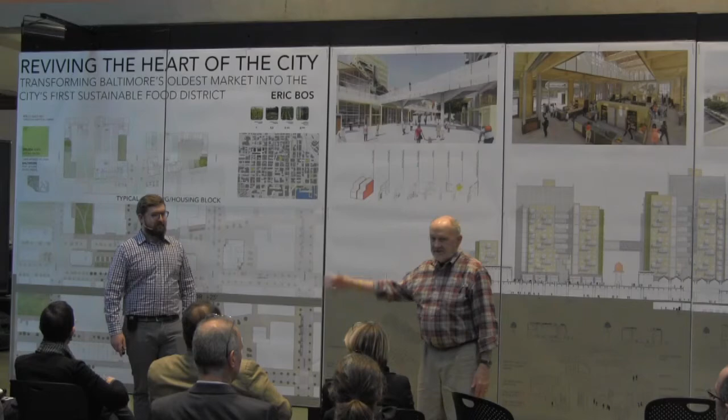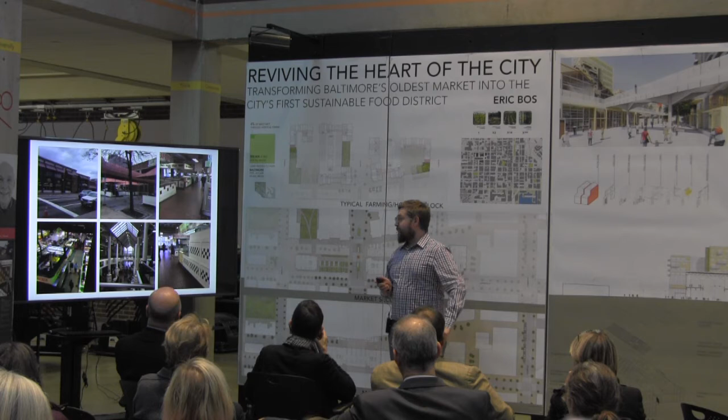10 years ago, I visited Lexington Market for the first time, and I thought to myself, where is all the food? As the market was then, as it is now, a series of bodega-like stalls selling chips and candy, fried chicken stands, and vacancy. Out of 97 stalls, 35 are vacant. Only 10 sell fresh meat, fish, or produce. This is the central market of Baltimore, a place where I expected to find abundance, but found scarcity.

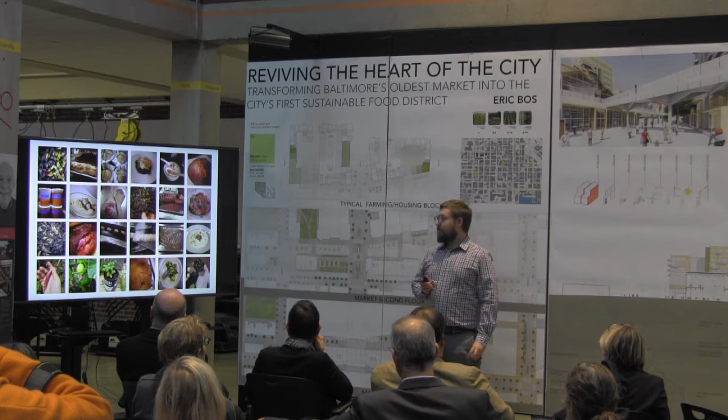So this thesis is about food. It's about how to replenish an abundance of good food in the city, of availability and access in Baltimore. A lot of neighborhoods don't have access to good food, instead replaced by snacks and junk food. And these food deserts affect 18% of the population in Baltimore, including, ironically enough, the neighborhoods directly west of the market.

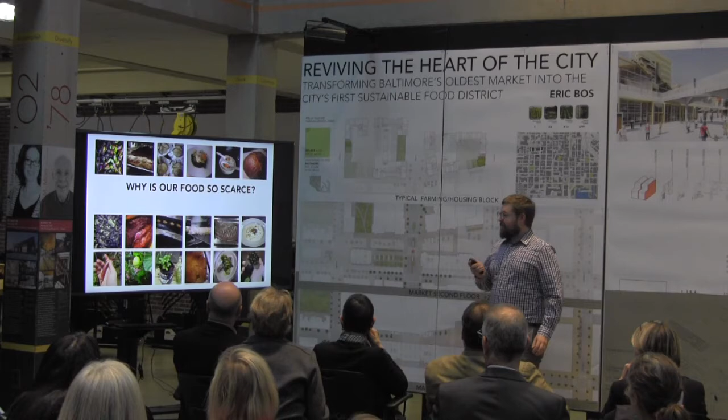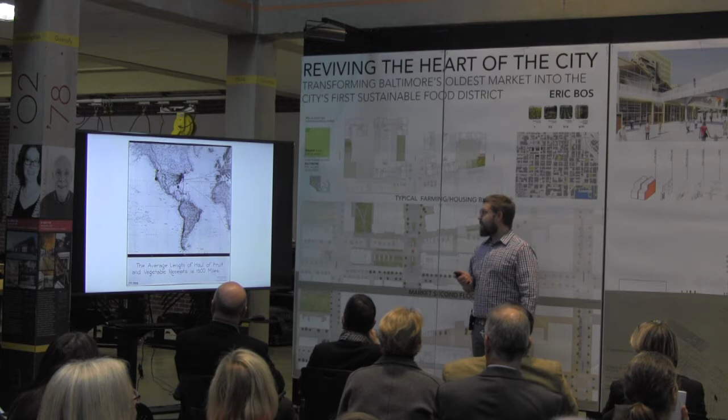But why is our food so scarce in the city? Part of the problem is that our food is grown far, far away. This is a graphic from 1924, and as you can imagine, we've only gotten more global since then. This creates two big problems. One, we're distancing ourselves from the food that we eat, from our knowledge about what's available in nutrition, and also it's placing an enormous carbon cost on each bite that we take.

But our urban history, from the Roman castrum at least through the Garden City movement, has been based on some degree of self-sufficiency, not on a global food system, where a dense urban core is surrounded and fed by farmland, which is then surrounded by forests and rivers and lakes and nature. But as our cities have grown in the last 100 years, that farmland's been replaced by sprawling suburbs, which has replaced our nature with farmland to feed everyone. And this is a trend that can't continue indefinitely.

In the next 30 years, 2.5 billion people are going to enter the earth. If this were to continue, we'd have no nature left and everyone would be hungry.

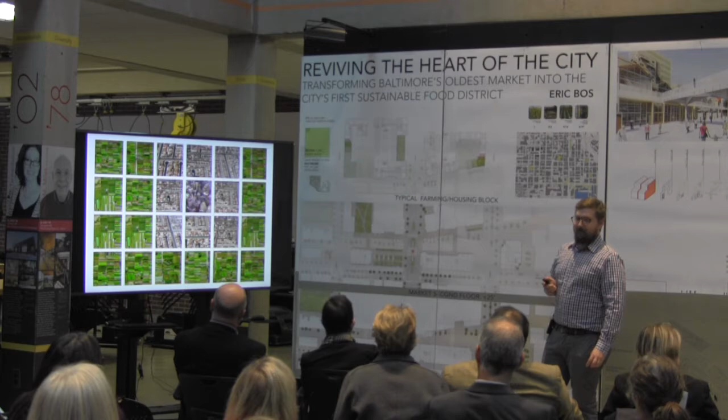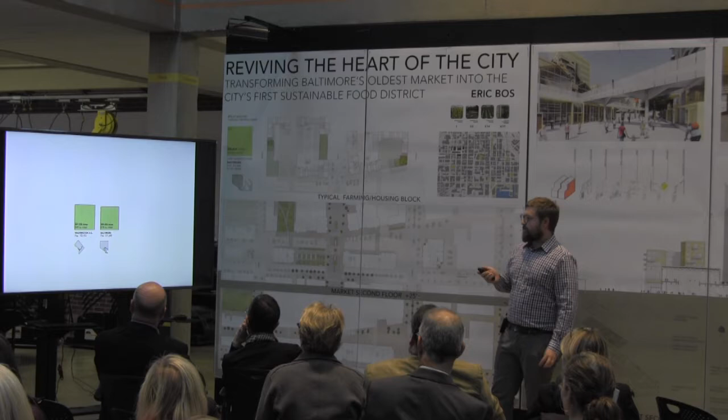Cities require an enormous amount of land outside of themselves to feed themselves. Here, DC and Baltimore, roughly equal-sized cities, require 5 or 6 times their land mass outside of themselves to be fed. Now compare that with New York, a slightly larger city, but so much more dense that the actual land taking to feed the city is just enormous.

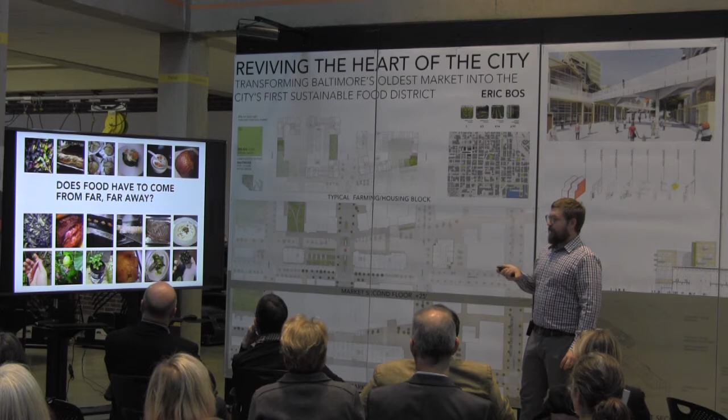Now, does that food have to come from far, far away? And of course the answer is no. Isn't it possible to densify our food production just like we have housing in cities like New York? Effectively turning the paradigm of the city surrounded by the farm to one of the farm surrounded by and providing for the city. And this is urban agriculture.

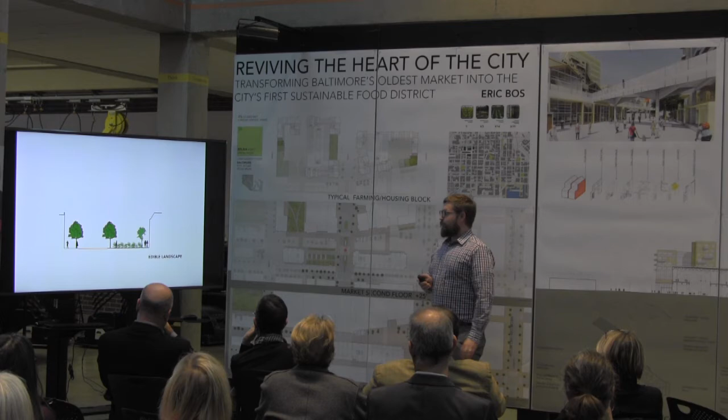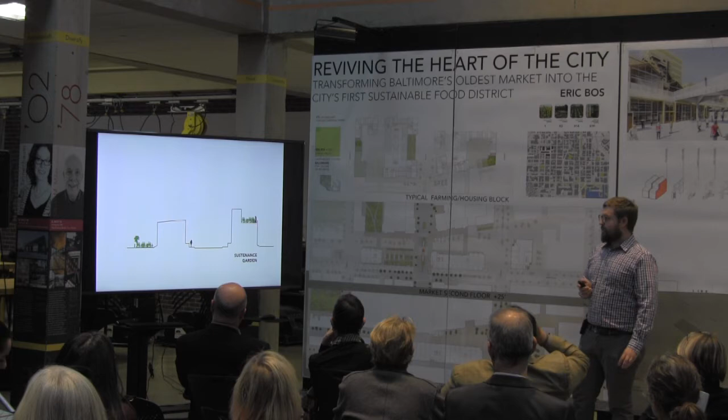Now, 3 main types of urban agriculture. One is the edible landscape, where tree line boulevards become orchards, and food is ripe for the picking all around you. The second is personal plots of land, where you're feeding your family—community gardens and backyard gardens, or the sustenance garden. And the third is a super productive indoor farm, or vertical farm, where we're feeding a large amount of people in a very small amount of space.

And we do this through really increased efficiencies. Most of our farmland is monoculture farming, which we use as a baseline. We have rows and rows, acres and acres of one product. If we take that and put lots of different types of crops together, it's intensive soil farming. So in our backyard gardens or community gardens, we can get 3 times the output. We bring that indoors using hydroponics, and it can increase by 14 times. When we stack these hydroponic systems, the sky's the limit.

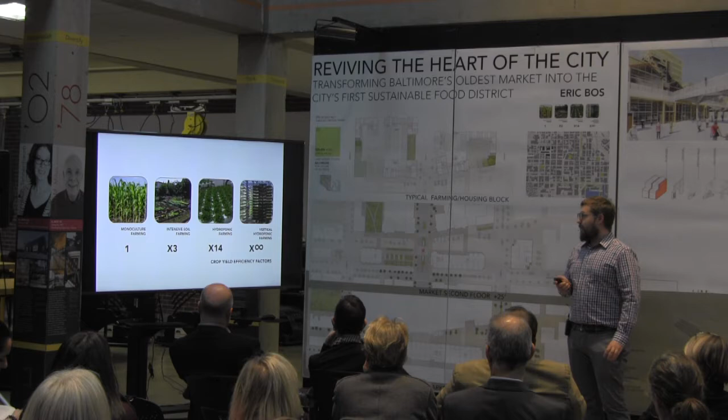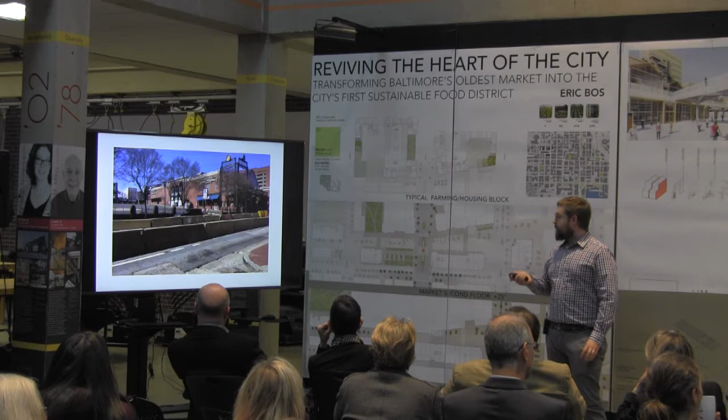So I found a perfect site for this idea of bringing agriculture into the city in Lexington Market, as a way to both revive a struggling piece of public infrastructure and show the efficacy of bringing a super productive landscape into the city. The market is in the shadow of downtown, roughly between Eutaw and Greene Streets, and just a few blocks north of the Inner Harbor and Camden Yards.

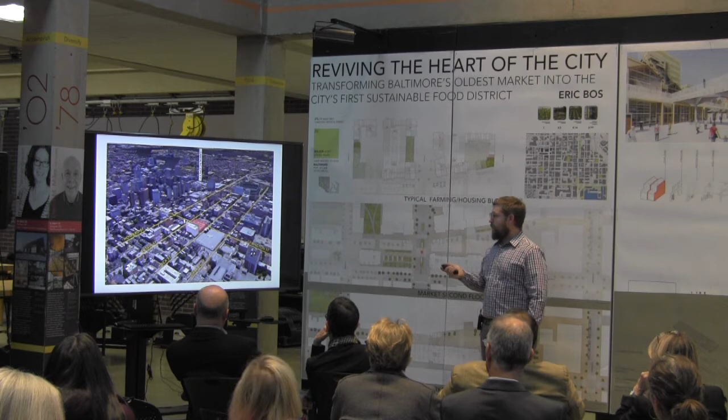The market was not always as it is today. For about 150 years, the market was a series of blocks, a series of buildings in the street. And this market worked, and it worked because it was extremely porous, it was surrounded by associated retail and commerce, and it was something other than the typical block. It existed within public space.

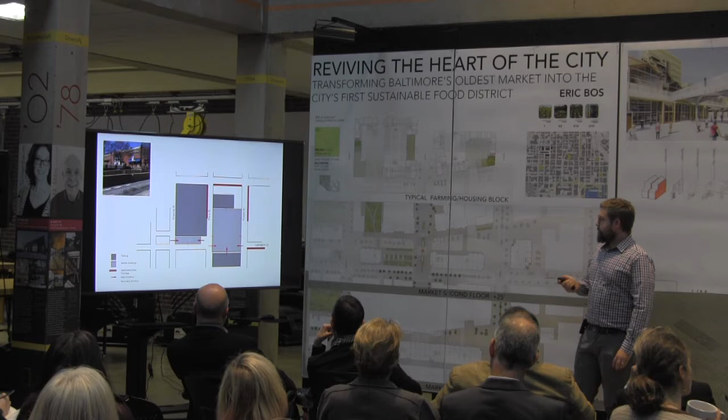In the 1940s, this market burned down and was replaced by what we know today, which is a nearly windowless brick warehouse surrounded by parking structures with very little retail frontage, and physically cuts off Lexington Street. You'll see it's a huge change. The market sits on a hill, where Paca Street in the center is the crest at 25 feet above both Greene and Eutaw Streets.

And it's extremely well connected. It's within a block of both mass transit lines in the city. The metro entrance is right across the street, and one block over on Howard are two light rail stops.

The gray area here is the site for this intervention. The first thing I wanted to do was to better connect this to the city by reintroducing Lexington Street and adding a new pedestrian plaza in the street, connecting the light rail stops on Howard, Eutaw, and Greene Streets at their level underneath Paca Street.

The new market exists between those two, effectively absorbing the grade change, where a single first floor connects both of these blocks. At the crest of the hill on Paca Street, you can either enter a second floor or a rooftop demonstration garden totaling over an acre.

Surrounding the market are four vertical farm towers, with an output of over 70,000 pounds of food per day, feeding 30,000 people a year. These towers are connected via basement level to a central distribution center, bringing this food all around the city, and a biogas digester, which is creating energy from waste.

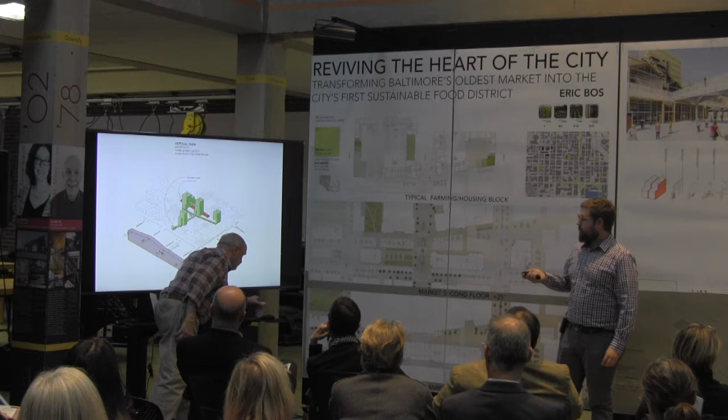Great idea, Carl. That's from the local brew pub, right?

Yeah. Now, surrounding these four towers is 850 units of housing, which is doubling the population of the area a quarter mile around the market, and providing an energetic user base to make this a nice, lively, mixed-use district.

Now, all three together, the market, housing, and vertical farm, represent the producer and consumer coming together on site. In fact, food is grown, sold, cooked, and eaten on site, which is a great linear relationship. But if it's going to be a sustainable, symbiotic relationship, it needs to be cyclical whenever possible.

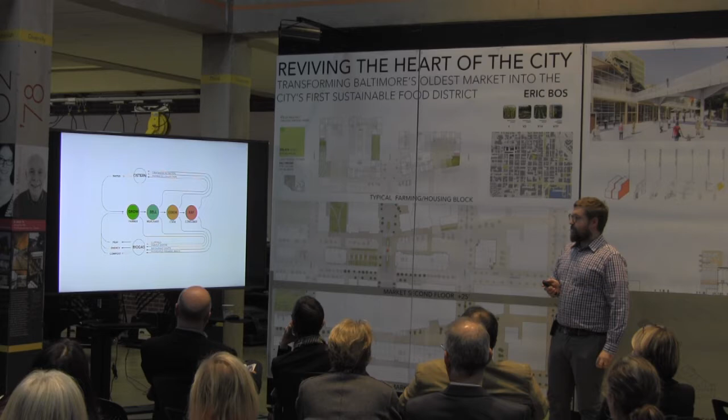So, by taking the waste from each of these user groups - clippings from the vertical farms, unsold goods from merchants, restaurant waste, and organic household waste - and feeding it through a biogas digester, we're creating heat, energy, and compost that, with recycled water found on site, provides all of the inputs we need to grow food here.

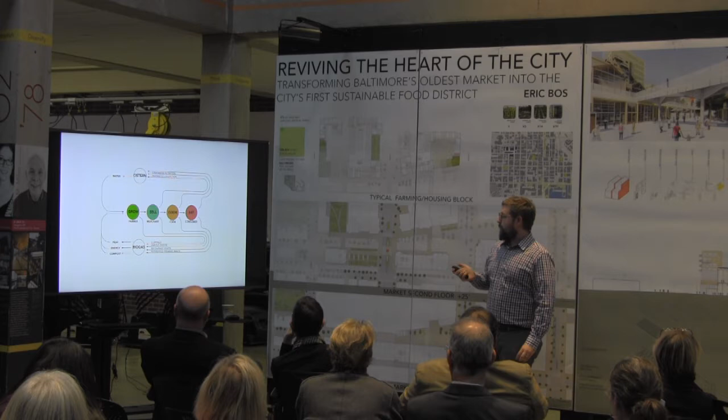Now, before we get into the specifics of the market, I'd like to take a look at the typical block, which essentially is the farm surrounded by the city.

The interior of the block is a vertical farm, and the edges are given away to housing units, giving light, air, and views to the people on site.

The vertical farm has ample glazed frontage, and light wells bring light into the building, which is also creating a cyclical flow from seed to growing to harvest, and that repeats itself indefinitely.

Light exists in a gradient in these towers because they're hidden behind housing blocks. But we can use that to effectively program what food is grown where. So the plants that need the most light are grown on the upper floors. Plants like kale that need very little light are grown on lower floors.

And shrimp don't need that. Yeah, fish and shrimp. Just mushrooms, mushrooms, things like that, all on the lower floors, yeah.

Or, when parking becomes unnecessary in the future, all the parking garages now, mushroom growing area. Or charcuterie cure rooms.

So these four blocks here are the actual footprint of these towers. But because this is stacked growing space, both several floors and stacked within floors, the actual growing area is this big - effectively the size of Patterson Park, for reference.

Now, we take into account a 365-day growing cycle, and the increased efficiency with hydroponics and a controlled indoor environment. The effective growing area, or the offset of outside farm area, is this big, which is actually 4% of the city's need, which is huge.

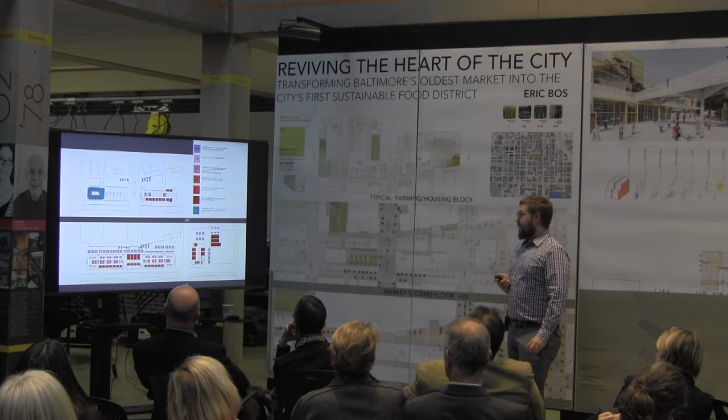The market can also spill out into public space and take at least 160 temporary stalls, so this area can absorb things like the very popular JFX Farmers Market downtown every Sunday. So if JFX were to go away, as some people have suggested, it can be here.

So the market itself is a series of repeatable modules, and in between those modules is a thickened poché zone, a thickened wall. That's the structure of the market, but it also includes all of the building services. Besides the structure, we have partition walls separating stalls, and within those partition walls we hide refrigerators, shelving, and trash collection. In the sandwich of the structure we had HVAC ductwork, or hood exhaust from fume hoods in restaurants, skylights, and rainwater collection, all existing within this poché zone.

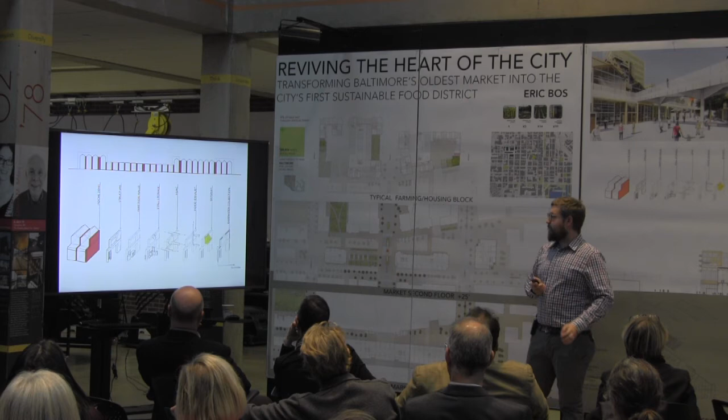And that structure within the market, and actually within the whole district, is mass timber, specifically CLT, DLT, and glulam columns and beams.

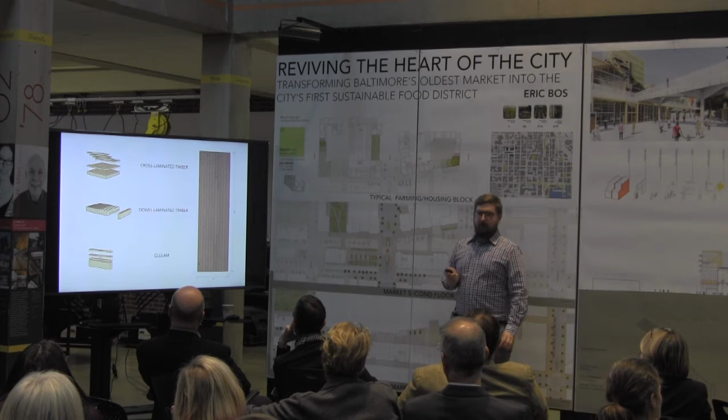The standard CLT sheet, 13 by 39, was used to inform the housing dimensions of the housing blocks surrounding the market, where each unit is 1, 2, or 3 of these standard sheet modules, letting the CLT floors and partition walls become an egg-crate matrix stabilized by CLT shear walls spanning several floors.

The vertical farm, similarly, is a simple glulam column and beam structure with CLT floors. The glazed portions of the vertical farm are a double envelope of glass, so we have a maximum amount of light coming in with a minimal amount of heat loss, and increased control over our indoor environment.

The first floor of the market, you can see our sandwich-structured poché zone marching along, and those are connected by what's essentially a wooden waffle slab holding up the roof. Where this market is 2 floors, we have a pitched roof where the ceiling is a DLT sheet with embedded skylights that are just openings in that sheet.

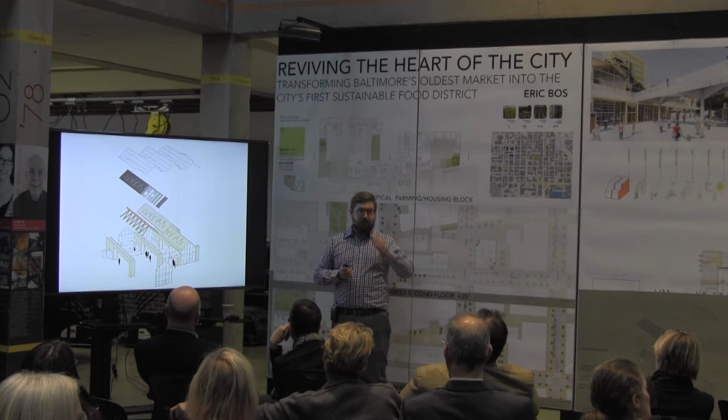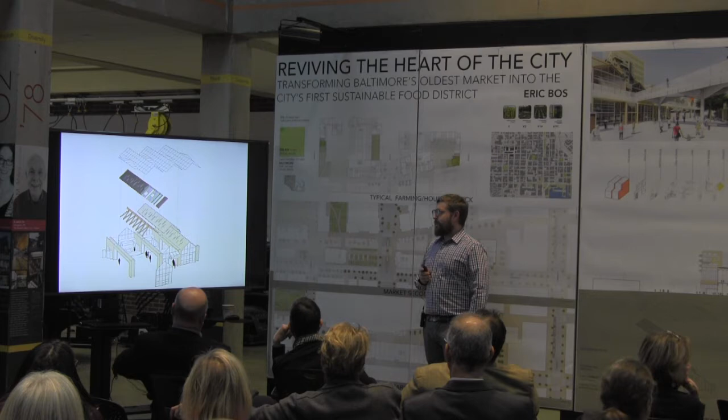These skylights aren't windows in the roof, but are rather the places where the ceiling doesn't exist, because above that DLT sheet is a continuous glass envelope. This makes a more elegant solution for getting light in here.

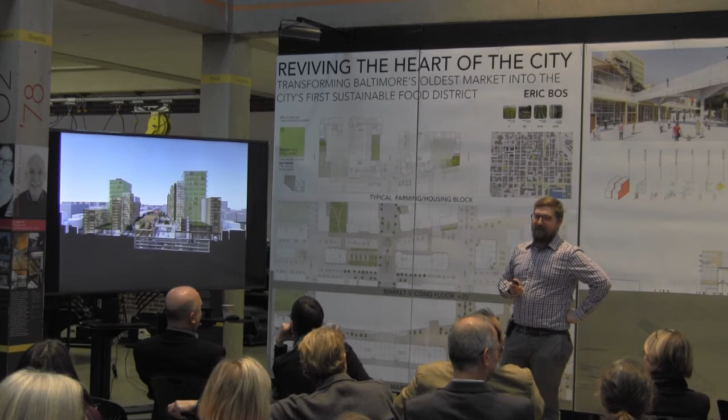The market is a centerpiece of the new sustainable food district. It's a gateway to downtown rebirth and is a shining example of integration of our food systems in cities. Thank you.

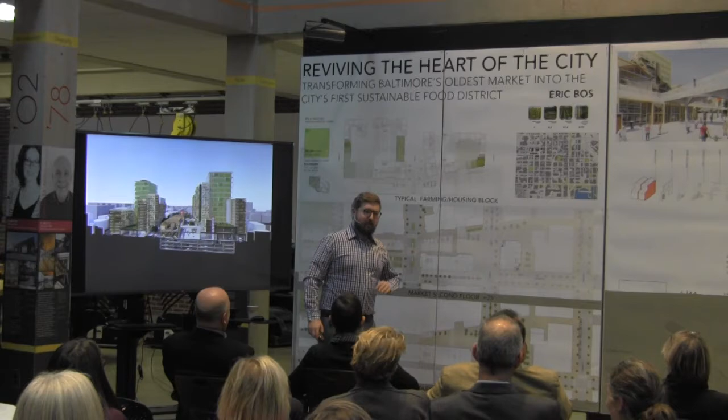Real quick before we take questions: on the bottom we have our first floor, which is the level of Greene Street on the west and Eutaw on the east, the continuous first floor. Above that, the second floor of the market, which is ground level at Paca Street.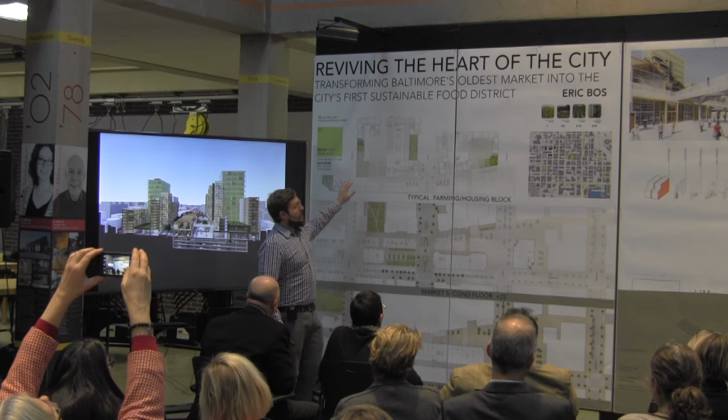So we enter either into the second floor or onto a demonstration garden on the rooftop. Above that is a typical housing block of the 2 blocks north of the market. We have the vertical farm surrounded by housing.

This section is cut directly through the long ways, through the center of the market, from Greene Street to Paca Street to Eutaw, where we have our Metro Underground. Over here I have a model I can pass around of 2 typical bays with a fair amount of detail in there, so have at it.

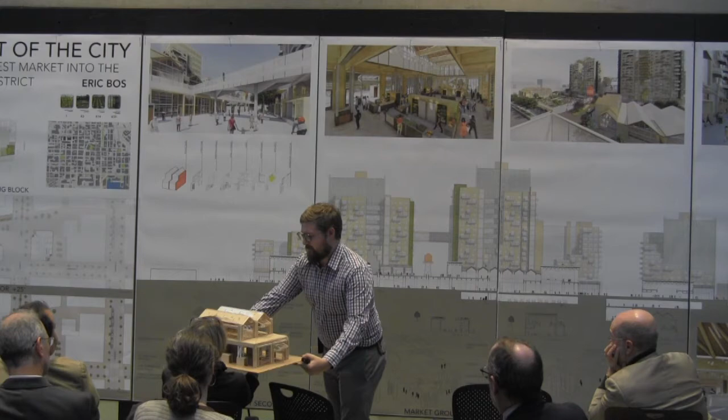Maybe you should say something about how much carbon is sequestered with the construction. A lot.

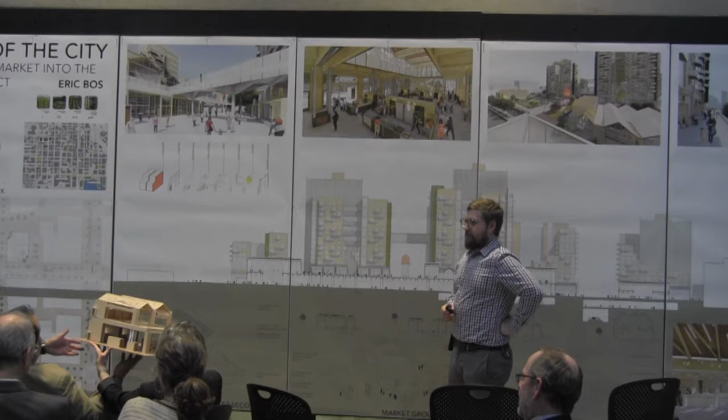So how many people could live in this? Space for 2,000 residents. Only 2,000? 850 units, but growing area to feed 30,000.

850 units and none of them are like apartments for 4 people? Well, some of them are, but some will be micro units. So on average, 2,000 total.

So each tower has how many units in it? Well, there's I think 12 different towers, and they vary. Each block has a couple of towers that are 15 to 18 stories in some places, and also a single-loaded bar building that has a terraced roof, so that there are several occupiable rooftops that can be sustenance gardens and community rooms for people living there.

So they vary, but the 2 northern blocks we show here are the most dense, and they get a little less dense as we go on the block on the south.

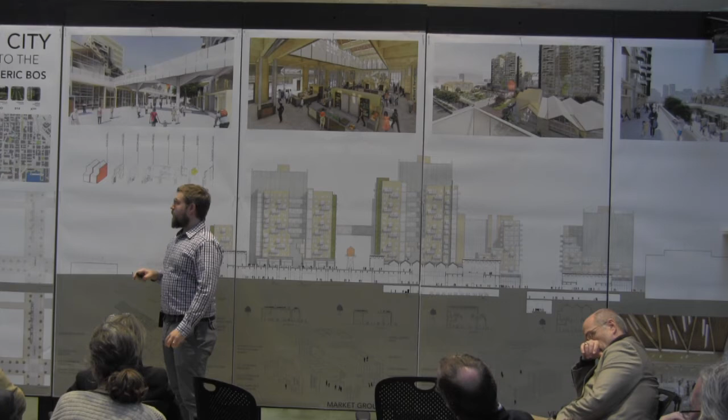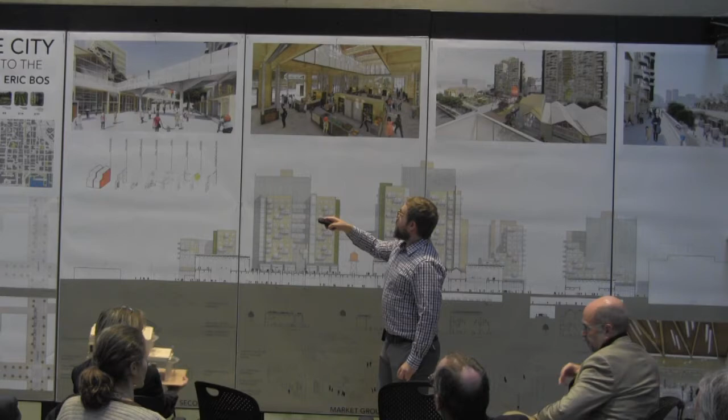Could you walk us through your perspectives? Yeah, this first one, we're in the public plaza looking towards the market from Eutaw Street. Can you show us on the plan where? Yeah, so here we're standing, here looking towards the market. Second one, we're in the first floor of the market. We have the second floor above.

Third one, sorry, we're on a balcony on the block on the south, looking at Paca Street. That water tower is the centerpiece on Paca Street. We can see the demonstration garden and the 2 blocks beyond that we see in elevation here.

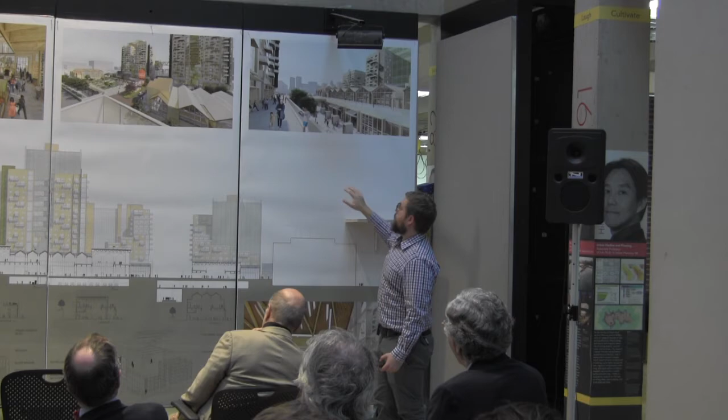And this last one, we're at the level of Paca Street on our second floor, sort of retail promenade, looking down into the public plaza. So that last one is taken from here, by this grand stair, looking this way. And below there's a shot of the second floor of the market, from here.

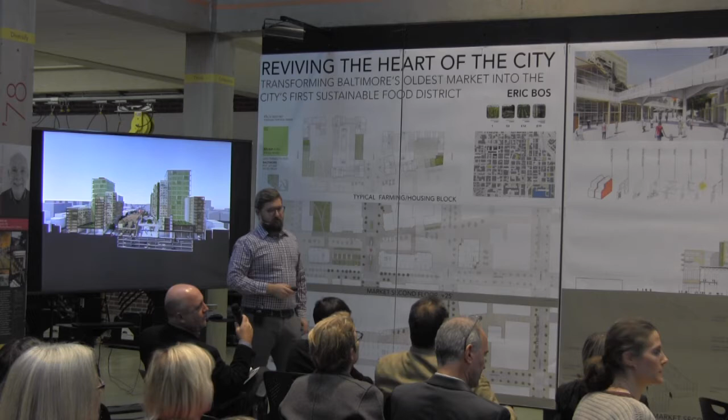So can you point out where the towers are? Where are the towers on your plan?

Here where we have all these sort of marching along things, these are grow stacks. So this is one, and this is one. And there'll be one on another block we're not seeing, and across the street also.

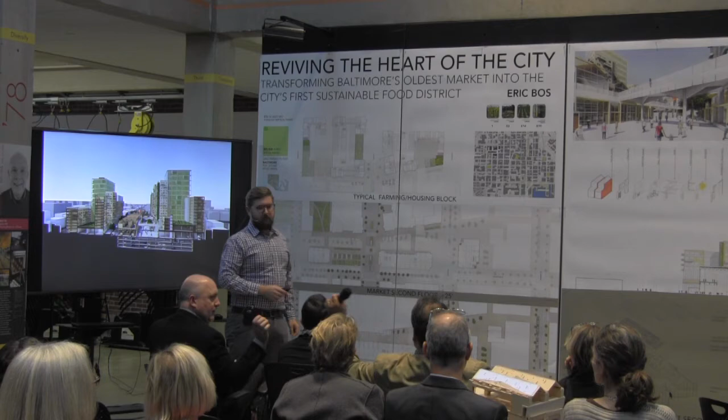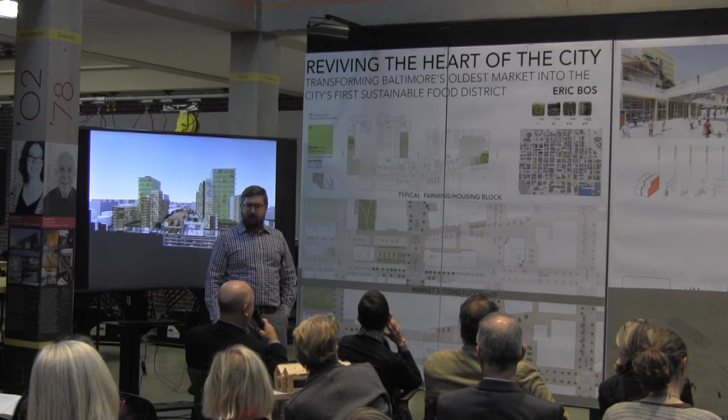I just want to say that you are to be congratulated on a wonderful presentation and an interesting topic, and an interesting solution for farming in the cities. It's something that, like you pointed out, is a problem, and this is definitely a very interesting approach. I think that bringing the typology of the market back, similar to what it used to be, but with a twist, is another great approach.

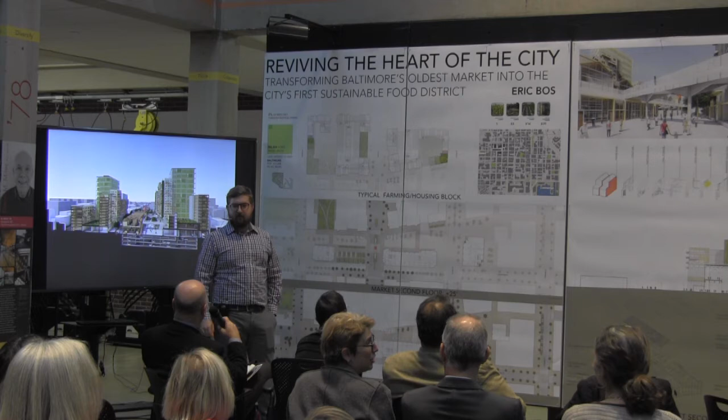My question to you is more on structure and the choice of wood, especially on those towers. I would like you to explain that to me, because I find that to be a little difficult to understand at this point. Okay, so I made sure that the housing towers topped out at 18 floors, which is the maximum in the new IBC for mass timber construction. And we're basically making the demising walls between units be part of the structure. So instead of having a column grid that goes up, it's load bearing. And together, even if they don't all line up together, they all form a stable matrix.

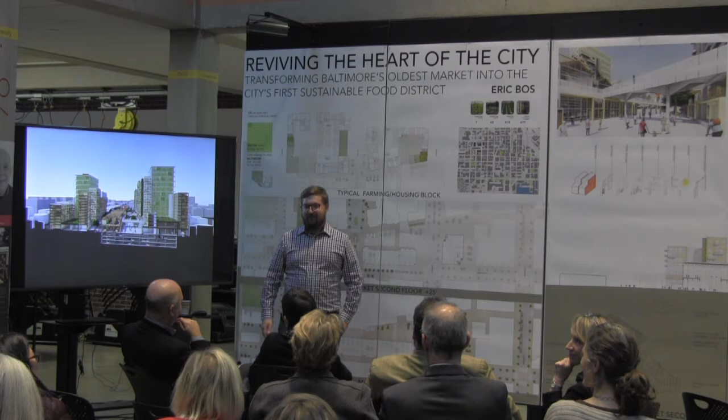And then having a shear wall basically placed in front of that, which is spanning 3 or 4 or 5 floors, stabilizes it from racking back and forth. So why did you choose that instead of a more conventional mode of construction, like a steel structure or concrete structure? That's a good question, and I think it comes down to what I think the future of best practice is going to be with building in cities, and that mass timber is going to be best practice very soon. Carbon sequestration. Yeah, it's all about carbon sequestration. I was hoping you're going to tell me that wood is the only building material that grows, right? Well, that's true, yeah.

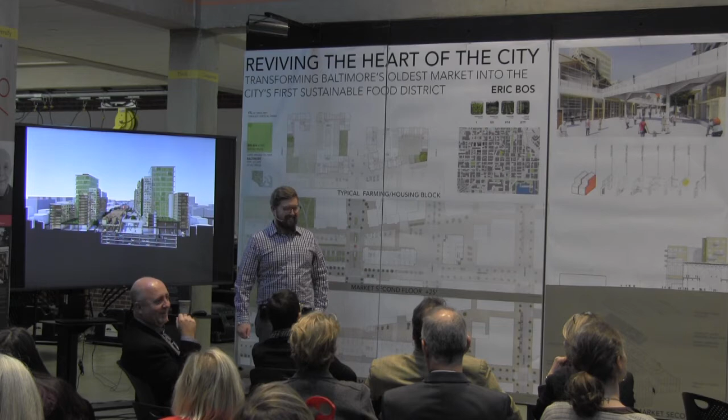This is a fantastic thesis presentation. It's so clearly drawn, I love that. And it's working at the big scale and it's working at the small scale. It's just fantastic, and you're really to be congratulated on that. I really have just 2 comments.

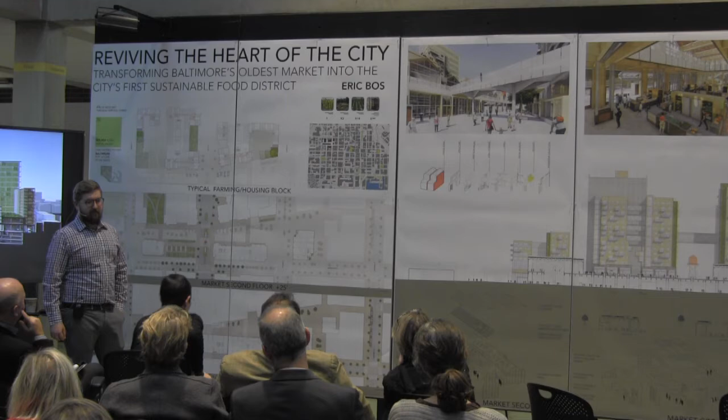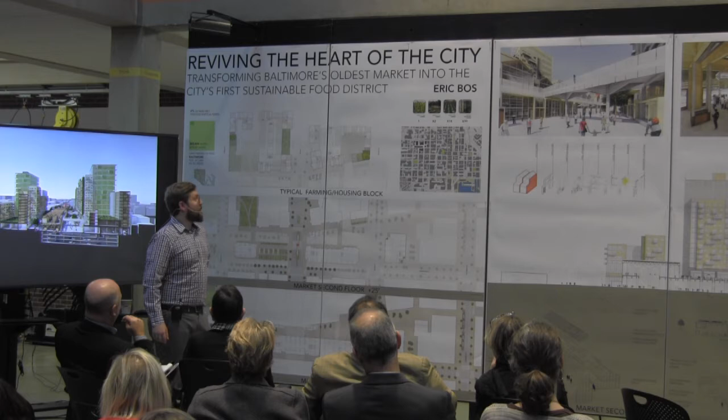One is on the residential units at the towers. It's terrifically inefficient housing, and I'm wondering why it couldn't be more developed, denser. In other words, is there a reason why this corridor couldn't come along and this become a double-loaded wing that then turns up, and you could do with half the elevators and half the stairs? So I struggled with this at the beginning a lot, because obviously double-loaded is going to be the most efficient, and they can sort of stack these together and I could fit probably twice as many units per area than I did. There's 2 reasons that I did it this way.

One is that each block has a sort of central courtyard that's a level above the public space here. So we have a sort of cascading levels of public space, going from the most public to the most private public space, cascading down towards the market. And keeping a visual connection there I thought was important. Secondly, while also dealing with visual connection, I wanted the elevator lobbies and hallways, wherever possible, to have visual access directly into the vertical farms, so people living there can see what's being grown next door. So I have it set up where you exit the elevator and you're looking through a glass window into the vertical farm, so you can see what's going on in there.

And I see the push and pull between all those things. I just think in order to ever build this, you would need to get much more housing, and maybe just have a single window in a corridor into the thing, not a whole glass wall into the greenhouse. Something you're going to have to sacrifice romance for in the next step. Yeah, well, right-size it, just right-size it.

And my only other comment is the skylights, or the lack of skylights, the openings in the ceilings in the market area. I think the light pattern falling on wares being sold would drive the retailers crazy. They really want even light, and they don't want direct light probably hitting the food. So maybe there's a more general way to bring light through, but it was an interesting idea to just cut the ceiling out. Maybe it's more of a continuous slot within a baffle or something. It's a wonderful place for bird nesting now. Right.

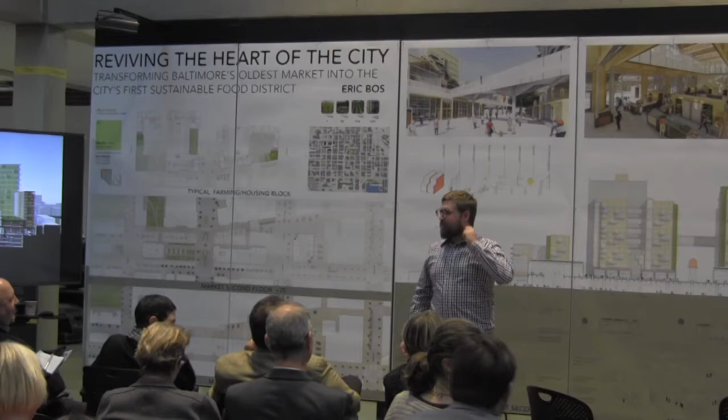The basic structure, the floors, is a series of CLT sheets, but then they have a 2-inch concrete floater on top, which is pretty standard. So you did think about that. And the cores we can see, elevator, the storage room, and the light well are all in the zone, can be concrete instead of wood also, which is our stabilizing factor through the whole building.

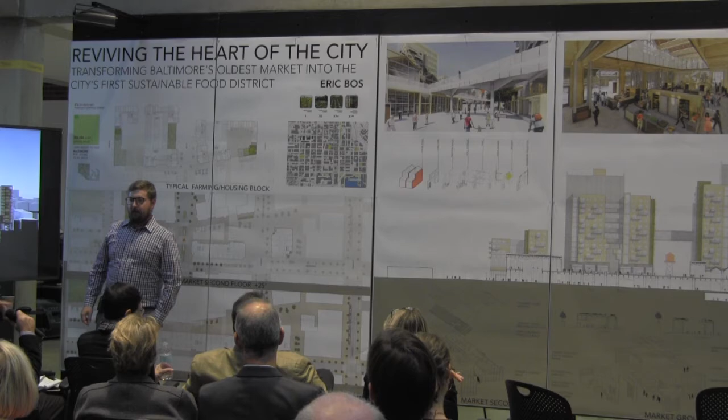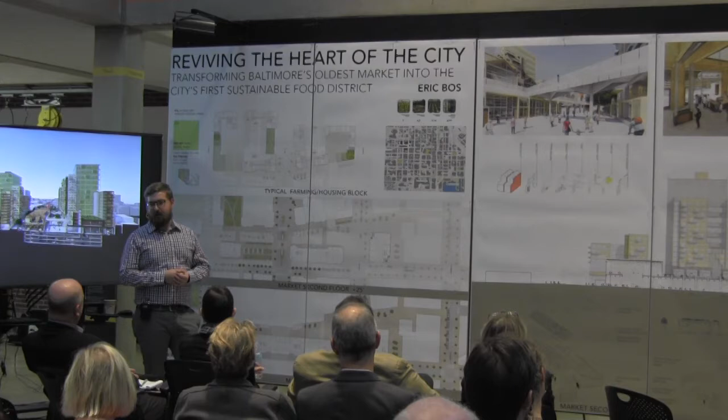Did you actually do a light study? You showed that diagram of the plants, tomatoes on top and fish at the bottom and so forth. Did you actually do a light study to see where the light falls, depending on how the building is oriented? Yeah, and actually I started with the plan view to determine where to put the other things we need, elevators, storage space, a pump room, by showing where the light is going to hit, an elliptical shape around the light wells and openings, so we can see what's the most light-profitable area that we don't want to put an elevator or a stair in.

And the same in section. Although the problem is that when you're stacking produce 20 feet tall on these racks, that's what's obstructing the light the most. So you really only get really good light on the stuff that's up against the windows, and the rest is supplemented by artificial lighting, LEDs. But still, upper floors get a lot more light, and the top floor is basically a greenhouse, great for tomatoes, and underneath that still has artificial lighting, but not as much as you'd need on the bottom floor.

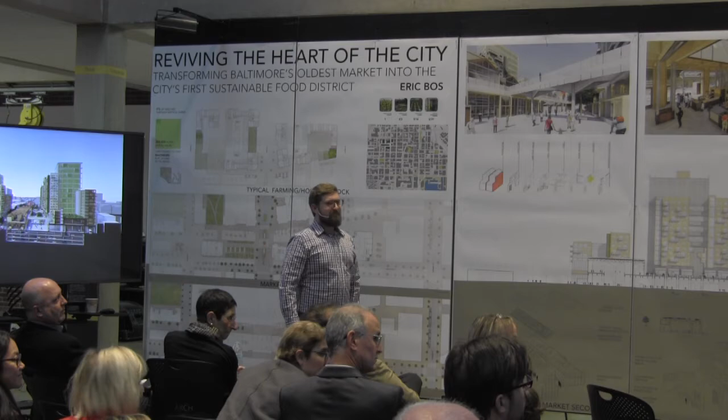It would be nice to know the embodied energy of a tomato grown here versus one grown in rural Virginia, versus one grown in California and shipped here. It's way beyond what I would expect, including all the transportation and stuff like that required. At some point, it's going to balance out a bit.

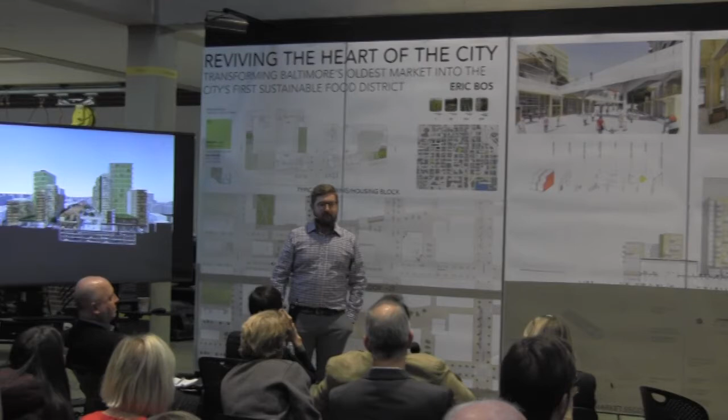Right, so what your project really is, and by the way, I think the beginning of it was really fascinating, the city surrounding the farm. So what you're talking about is really the end of nature, right? I've read this thing about how nature needs our assistance now, that nature can't take care of herself anymore. And that's really what you're talking about here. I love that cyclic drawing you had of the waste and the growing and all of that. So I think the ideas here are really tremendous and very interesting, and I think at some point will be practical. I'm not sure that day is today, but I think it will come.

And the urban design, I did not know the history of Lexington Market and why it's so horrible now, but clearly this is much better. I think the next thing for you to do, because I really think it's a great start, would be to work on the architecture of the buildings, which I find actually not convincing.

The housing seems a little overly complicated to me, at least at this level. I just think these elevations need more work. I do think as a type, surrounding this incredibly cool glassy farm in the middle is kind of incredible, it's really great. But I do think that would just be the next layer of study, that's all.

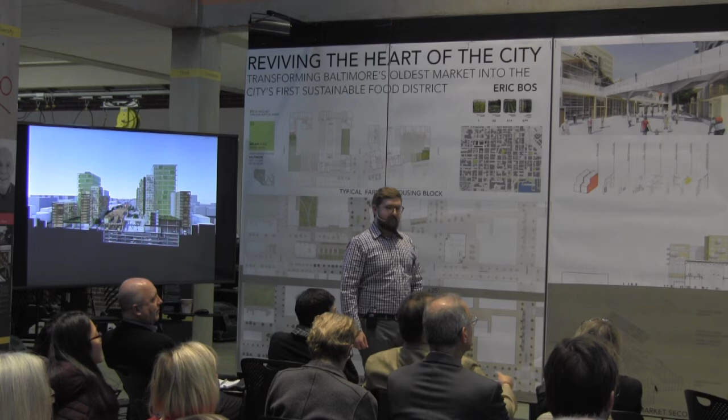Beautiful project and a very powerful idea. I can't help but think that Amy's point that there's kind of this push and pull between the housing and the vertical farm, and I'm sure you developed that bulk based on light needed with the hole in the middle. I wondered if you tried a tower that's just exposed on four sides. And you do have farming with two exposures for some areas, right? You've got the hole in the middle of the courtyard, plus the perimeter.

Yeah, and so I want to believe that, well, I think the housing, there needs to be more housing, and perhaps that shrinks the towers, but I want to believe those towers are going to look like that, and perhaps even more colorful.

So speaking to your elevations, I think there's a richness to that facade through the different glass types and through what's behind it that's not revealed in your elevations. The tectonics of the market building are really quite wonderful. You put so much thought and care into those, giving us these nice diagrams.

When I look at the interior, I get that market feel, but what's missing for me is the food. What I'm seeing looks like pop-up restaurants, not necessarily stalls of food. When I think of Pike Place Market, which is just full of food, flowers, all of this, I think was the genesis of your idea, and certainly the old images of Lexington Market, where there's just people and food. You almost don't notice the architecture, but the architecture you've made is quite beautiful. So, nice job.

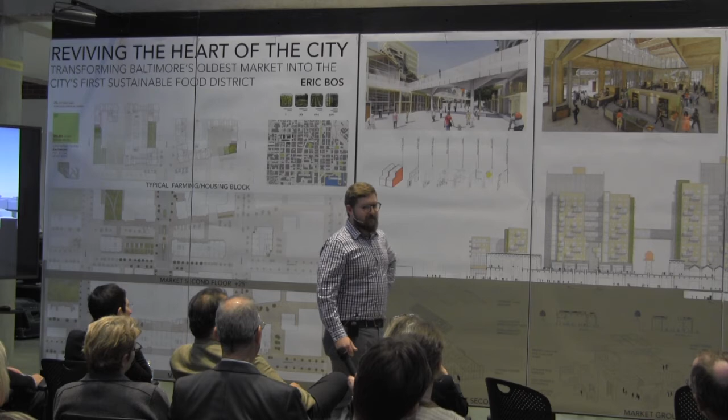Yeah, I think it's a really good point. And speaking to this schism in the idea of the future of food - if it's a technological advancement, which is the vertical farm as I've designed it, a sort of controlled environment, versus the other side of that being a reversion back to what used to work over 100 years ago, when we used to feed ourselves seasonally. In order to address both of these concerns...

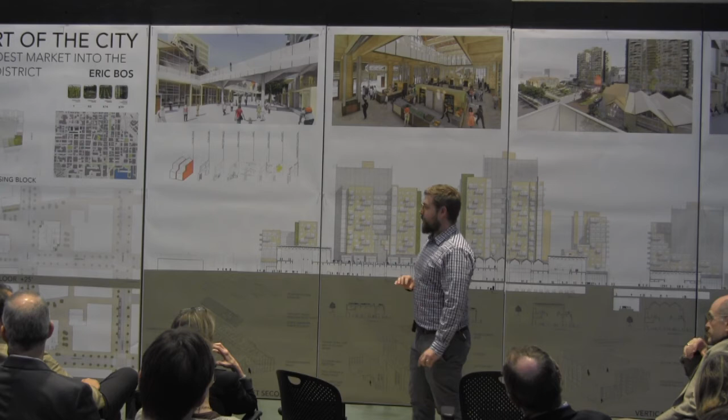Were there precedents and case studies for this sort of vertical farm? Any critical dimensions or anything? Because you did give a lot of real estate to the vertical farming component of the site. So I'm curious what kind of examples you looked at.

Yeah, so obviously nothing at this scale exists today, but I used some dimensions - both structural dimensions for mass timber, and also dimensions of typical growing racks at current vertical farms. The largest now is in New Jersey, and it's basically a nondescript warehouse in the suburbs - you wouldn't even know what was in there, but it was the largest producer of indoor aeroponic lettuce in the world. It's actually super sciencey, the inside looks really cool.

How tall is it? It's a one-story warehouse. I'd be surprised at more. Yeah, which is more speaking to the cost of real estate than anything.

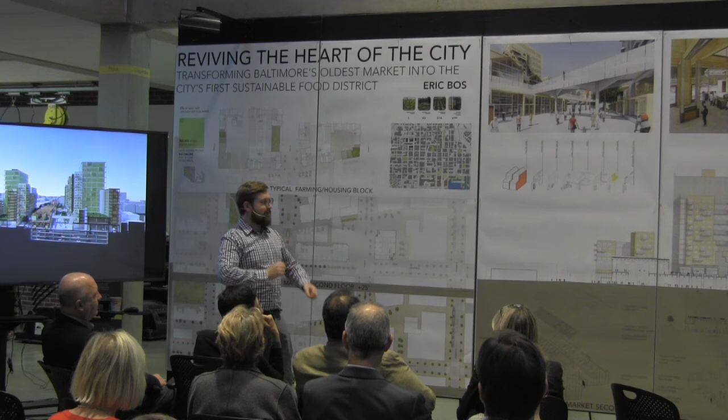Am I trying to replicate what they do there, but in a way that's more visual and more urban? There are more like a couple of 40,000 square foot vertical farms that exist throughout the world, and there's one in Jackson Hole that's pretty cool. It's on the side of a parking garage, because it snows 12 months a year in Wyoming. So that's a huge need why they built this vertical farm there, but it boasts an efficiency of 100 times

more product than would be if it was grown outside. And it exists in a similar way where it's a city-owned property that is at once a vocational school for people, but also a place where people are getting food cheaply as community members. So it's a very compelling new building type and attempting to solve a problem.

I'm curious about the programming of that piece and the people who occupy it, how you collect the food, how you bring that down to the ground plane and bring it through to the markets. That's all another layer and colorful piece of witnessing this farming that's happening inside a building. So is there a program in the building, or is there a procession or sequence about collecting the food that's kind of celebrated?

As I mentioned briefly, the light well creates like a donut shape, so we have a cyclical flow. I've made it so stuff comes off of one freight elevator, it's seeded, it grows, moves all the way around, and it's harvested and goes into the other elevator, goes down to a basement level. So these racks are on wheels, so the racks move themselves. You plant 5 racks every day, and then you move them 5 places and plant a new set of 5 racks, and then after 30 days or 60 days or 80 days, however long that plant takes to be ready to harvest, it's moved around and ready to harvest.

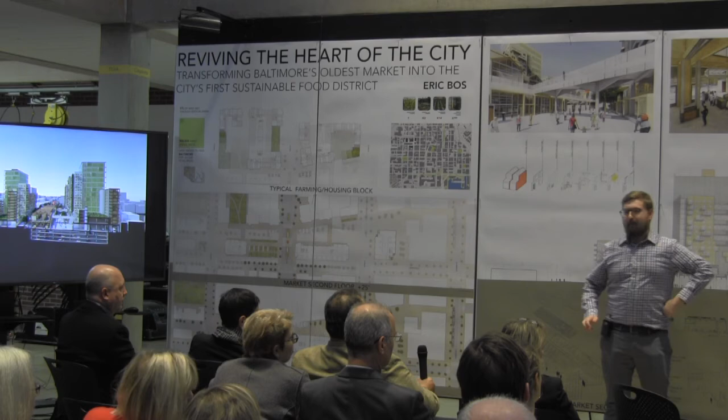But then I have all 4 of these connected at basement level tunnels, which I have one little one sort of cartooned in here with some big crates and people moving around, but then move underneath the market to a distribution area, which is in the podium underneath these 2 blocks. So in the same space as the market, connecting underneath the hill at Paca Street. So we can get trucks coming in like Greene Street, filling up, and then exiting on Eutaw.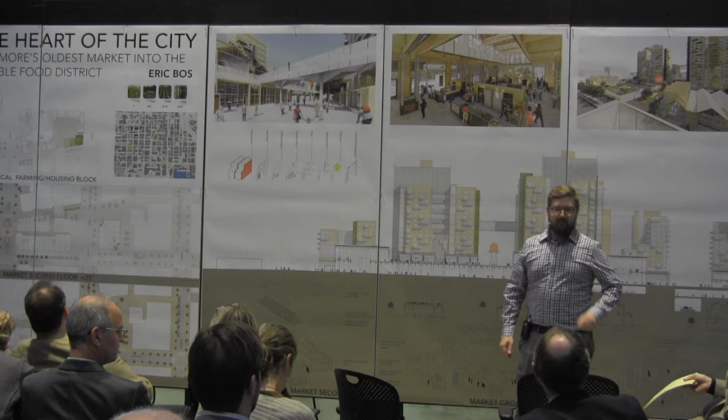Great project, really beautifully done.

Getting back to Jana's point, right now there's this sort of cleanliness of edge between the various things. If you think about ecotones, which are those transition zones of complexity and diversity, is there a way to create those between your building types and even in the landscape between the farming area and the market, to add that diversity and complexity, and think about ecotones that people are part of, right? They are diverse cultural zones that connect these things. It's possibly a way to think about complicating and making it a little bit more messy, what is clearly beautiful, but something to think about.

I've been thinking about the opportunities for learning and all the facts and things you showed us about the amount of space it takes to grow food, and how so many people don't understand, if you live in a city, where things come from and what the tree is that a fruit came from. I'm wondering how you've thought about those opportunities and if there's a school that's part of it, which kind of goes also to the programming question that Chris asked, but another part of it.

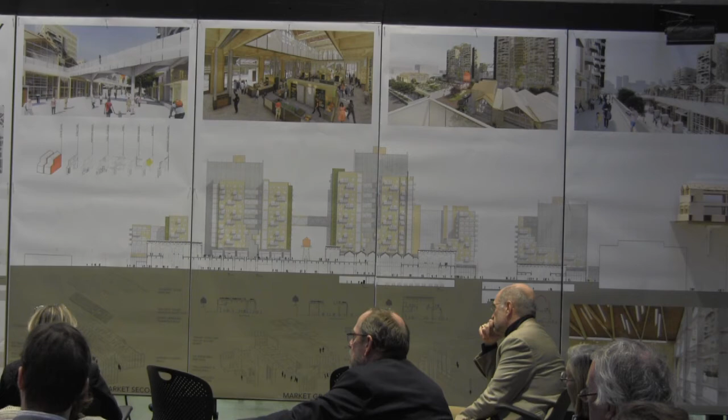Yeah, so I always assume that there's going to be sort of loads of educational training going on throughout all the different pieces of the program. I had set aside these larger pieces in the center of the first floor of the market that are underneath the Paca Street Bridge as a sort of teaching kitchen. So that's one aspect there.

I also set aside this pavilion at the end of the demonstration garden, between the demonstration gardens, that's on the second floor on Greene Street, as community space. So instead of profitable retail space, that's meeting rooms and basically flexible space where all this stuff could happen. And then surely there's some sort of vocational training that goes on with the farming, because our urban farmers aren't going to be people from outside coming into the city to farm. It's going to be people that live in the city learning a new way of producing food. It also might be like the farmer who lives next to his or her land, with the people living in the buildings being the farmers, I don't know.

But I also wonder about the children growing up in those spaces, and if that's part of rethinking, if we're trying to reseed a future that takes these things more seriously, there's an opportunity to validate it through education.

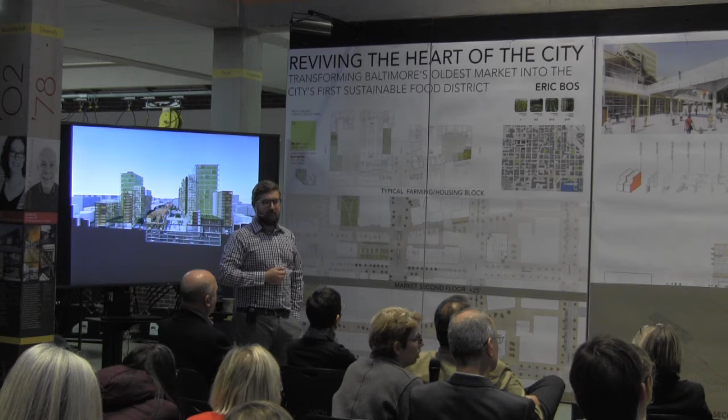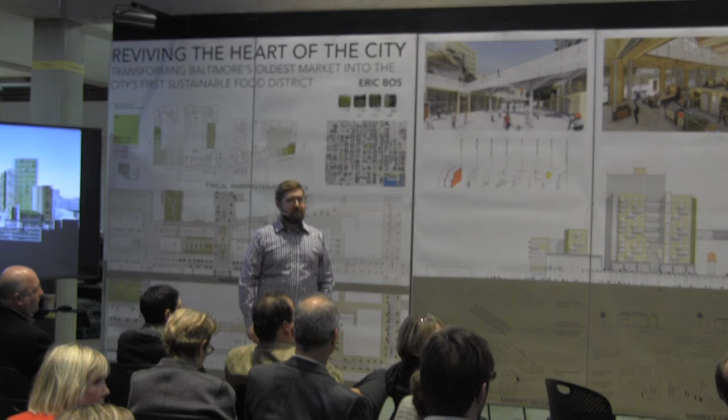Very nicely done, Eric. It's always fascinating to be there at the very beginning and then magically see these projects appear at the end. I wanted to very briefly go back to building image, because ultimately when you create an impetus for this to actually happen in Baltimore, you're going to have developers and other interested parties who are going to be intensely interested in marketing the project.

The elevations are somewhat reminiscent of Jose Luis Sert's architecture in Cambridge for me. I can't tell you exactly why, but some of the dormitory buildings and the infrastructure that he created there. So the litmus test would be for your developer friends who you're going to be working with for 7 years in this: can you reduce this project to a signature concept drawing that's going to be the icon that tells everybody this new building type has arrived in the city?

And it's a really fascinating problem. I would just say it's sort of the spiritual and human dimension of introducing this new and powerful building type, this system, which is a very exciting proposition, which I can't quite see yet in your elevations. It's not quite there, in all the comments about the messiness of the natural world and all of that and interacting with the housing, I think are all very much to the point. So I would encourage you to get your hands dirty in this and think about how this new building type becomes a powerful new partner in the city.

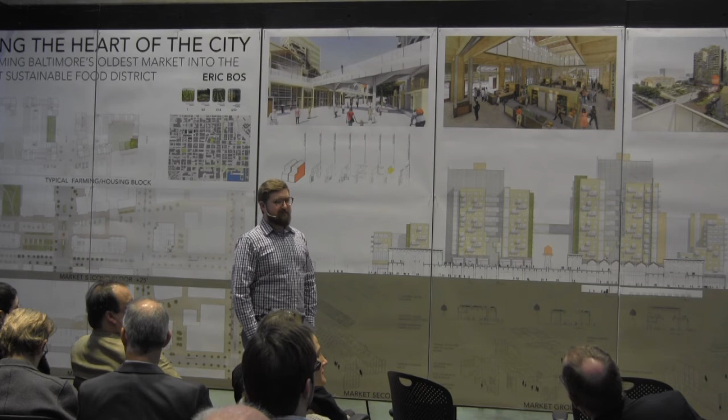Just to really get across the idea that I think is one of the potent ideas here, that you have made a social setting to build community around food. So that you're not only going to be sustaining life with food, but you're really going to be sustaining community, because man, people bond over food, and we can look to Europe for the huge success of the markets. Just unbelievable. I'm picturing this just swarming with people and food.

There's a fair amount of literature that says we need to leave about 50% of the earth untouched or we're in big trouble. I have a feeling these are going to be fairly energy intensive, but this may be a way that we can grow our food without destroying the nature that we need to leave in wilderness, because it's just too complicated for us to manage. It's just beyond our abilities. But this kind of thing may be a future that's going to happen.

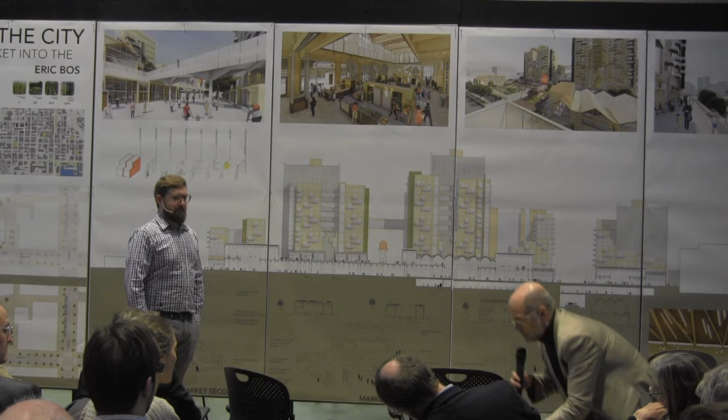Actually, on Friday, I picked up the New York Times, and there was on the cover a photograph of a portion of Brazil that's been cleared by fire in order to make for more agricultural land. In this last year, according to the New York Times, which I believe is reporting real, true knowledge, I believe in the New York Times. It reported that last year alone the Brazilian government permitted the burning of 3,700 square miles of the Amazon rainforest to create land for agriculture. And this, to me, is a crime against humanity. This is clearly an alternative for that, although probably at the moment not accessible to the Brazilian mindset.

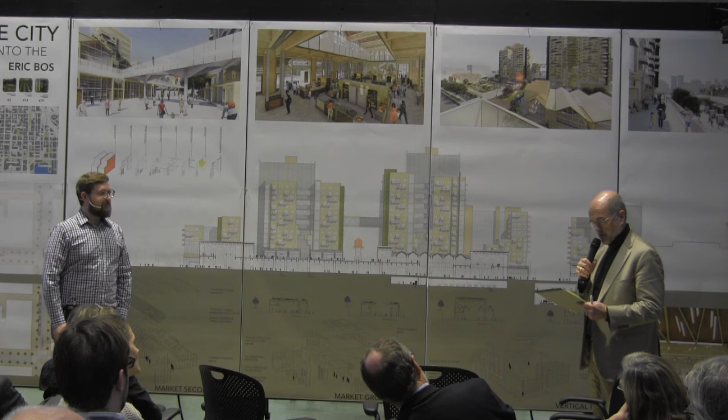There ought to be a complaint lodged in a court in The Hague or something.

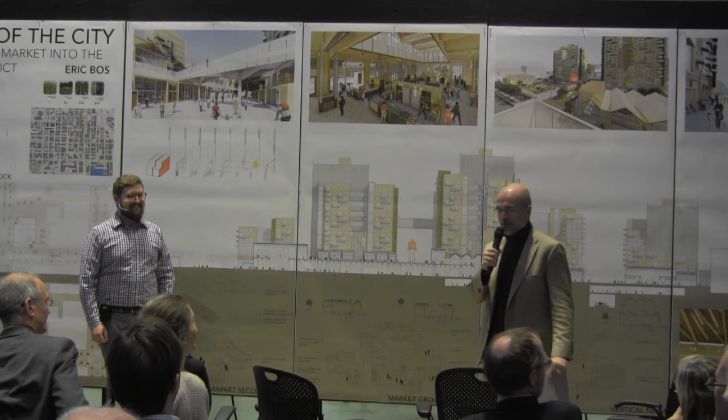I want to thank Carl for scheduling this at the end of the day, because like most of the crits throughout the semester, every single time I got together with Eric, I felt a certain hunger after this discussion of food. This is the appropriate amuse-bouche for this afternoon. It's got our mouths amused and ready to go. I think that's quite lovely.

The Mercado San Miguel in Madrid is someplace you need to go visit. It is the greatest fetishization of food that you could possibly imagine. The presentation, I think Maddie hit it on the head, is that food is presented in a way that you just feel like you could graze in there for days.

Eric's background is clearly in food. He was a butcher, a chef. I think we actually saw some of his product in one of those slides that had his brand on it, a prosciutto, or it's a pork belly. Okay, so he really knows about food.

He started off knowing about food, but then he kept going back up the supply chain to find out more about it. I think that's what makes this incredibly compelling, is that it wasn't just relying on what he already knew, but using the educational experience to fill in what he didn't know, using this project to do that, which is kind of what education's about. It's not about what you already know, it's about what you don't know and figuring out how to learn about that.

Also, like Adon's thesis before, we got to a point where the committee suggested to Eric that the project had gotten so big and complex that what he needed to make were a series of diagrams. Those axon diagrams at the very beginning were very helpful in communicating the intent, but he needed to devote focus to one of the buildings, the one he actually started with to critique, which was the market. So noticing, as many of you have, that the other buildings are maybe more diagrammatic, more anemic in comparison to the market building, is perhaps, in this instance, to his credit that he chose to develop the market so that we can look at the market.

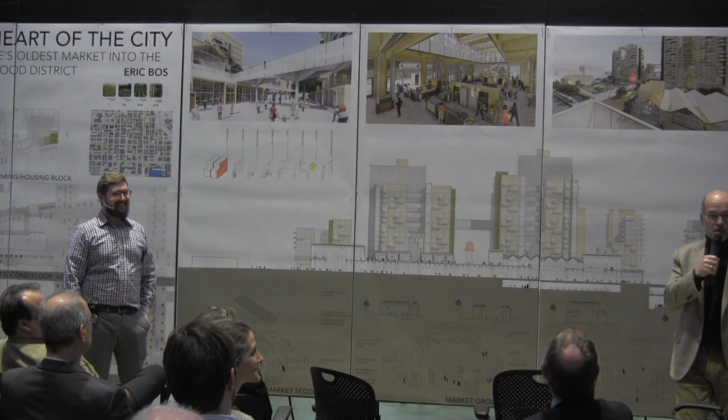I think that also accounts for why the market is not yet open for business. It's stocking its food, Maddie. It will look like the Mercado San Miguel. He wanted to show us the architecture. It will look like that at the appropriate point.

I also just want to mention that the starting point for this thesis was actually last semester in Architecture 601, where Eric and Trevor Wood, who's in the back of the room, won the Association of Collegiate Schools of Architecture Timber in the City competition for a high-rise timber building in New York. They won against, I don't know, 900 entries from around the world, some huge number. They came in first place. We're really proud of both of you guys for doing that.

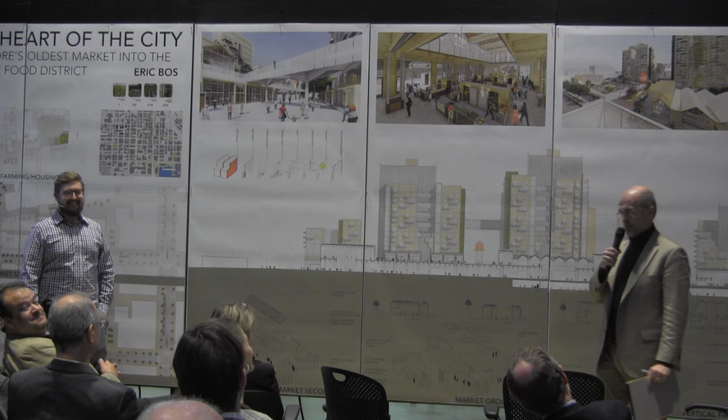The last thing, and yes, Professor Noonan, and his very calm, charismatic guidance there got him through. Peter is a wonder.

I just want to comment on something we were worried about about a week and a half ago, and I don't know why the hell we were. We were worried about the presentation. Not about the drawings, not about the graphics, because we could see that was developing, but we were really concerned that Eric needed to put this together with a kind of emphatic oomph to it. There was this whole discussion about how you can't get up there and do the monotone. You didn't really change your pattern of voice very much, but you slowed down a lot. That was really good. But what you did is really interesting.

I want to point it out because there are a lot of younger folks in the room, in the back. It's really common when students get up and present, they'll present things like the janitor tour of the building: well, here's the front door, and then you go here, and then you go there. Or they'll present a project like it's my struggle: I did this, and then Peter said no, and then I did that, and Brian said that stupid idea, and then Carl told me to do this. It's always the worst thing, you blame my Carl.

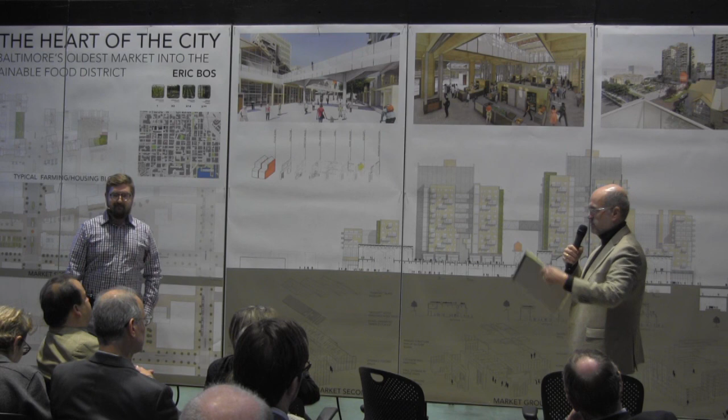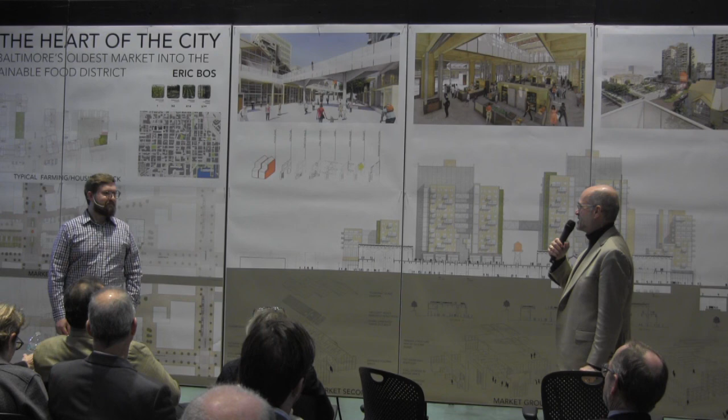How refreshing it was to use the story of food to get us all into this project and to tell us what the big dilemma was. You told us what the problem was, and then you proposed the solution in a very elegant way. To me, while this is perhaps the beginning, Jamie, of the answer to your question about the drawing for the marketers and whatnot, for me, the thesis was that series of axon diagrams that really explain the way you were conceptually thinking about weaving these things together in a very rigorous way. So I've got to say, storytelling ain't dead. It's really a great art form, and you did a fantastic job of it, and congratulations on a really beautiful thesis. Thank you.